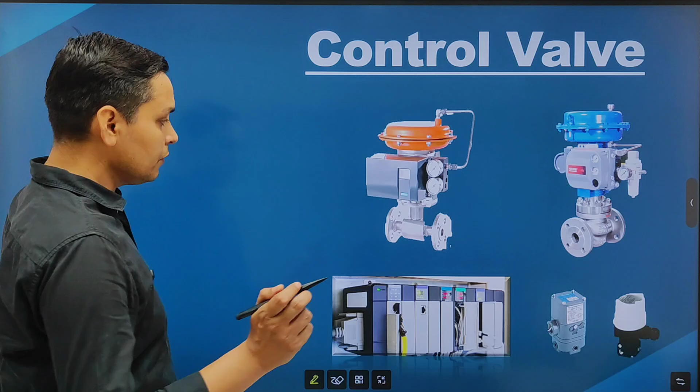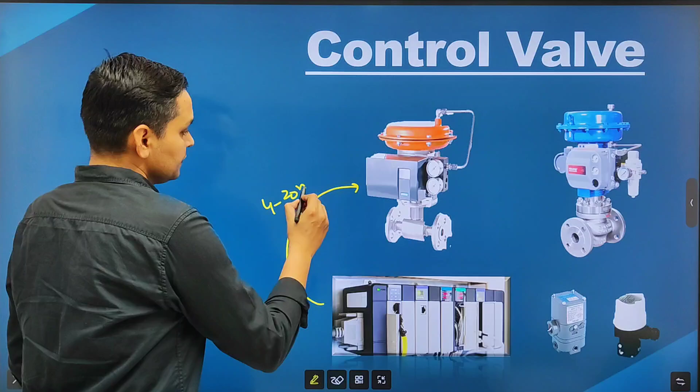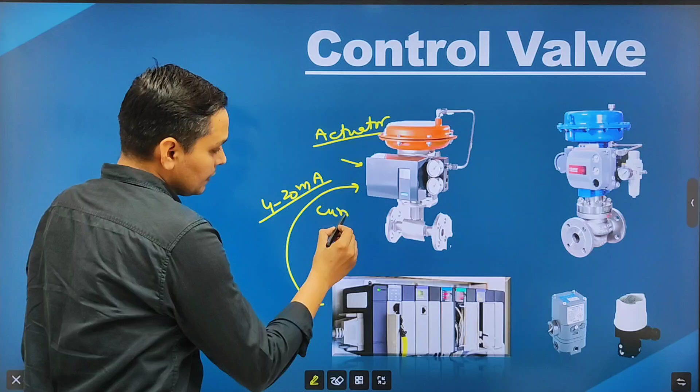Look friends, to operate a control valve, we will use a controller like PLC, DCS or PID controller. From this controller, a 4 to 20 milliampere signal is sent, and this 4 to 20 milliampere signal is sent to its actuator. Okay, now this signal is a current signal and we can denote current as I. Here in actuators, we can use a smart valve positioner, an electropneumatic actuator, and an I2P converter with valve positioner.

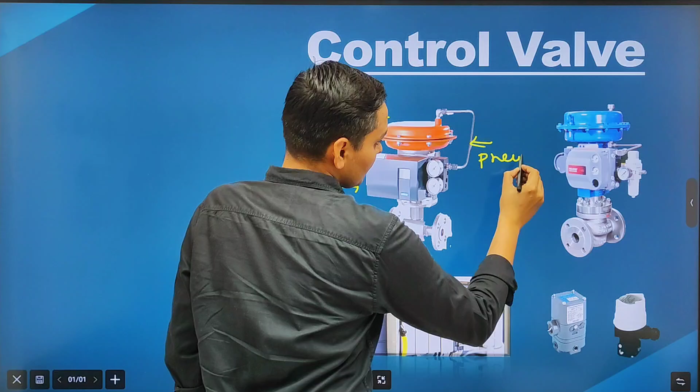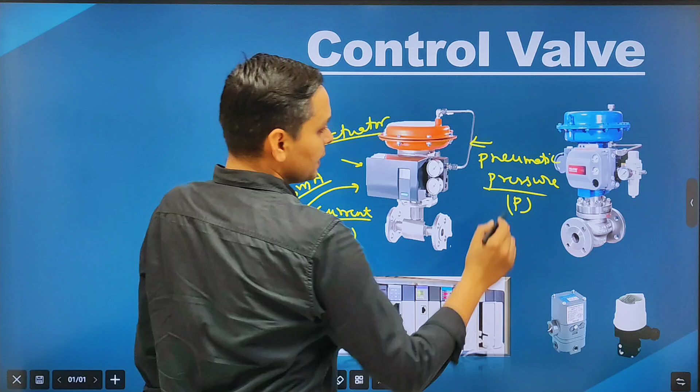Now, you can see that here a pneumatic signal, or pressure signal, is given to the control valve. Here pressure means air pressure, so we will denote it as P. Now to convert this I signal to this P signal, we will need a converter, so we use an I2P converter.

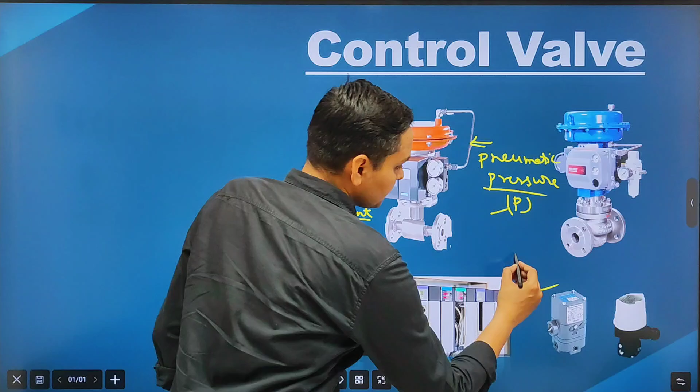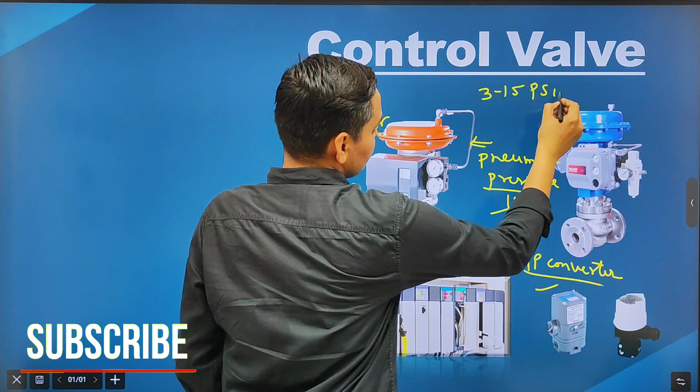And this I2P converter converts this 4 to 20 milliampere signal into a pneumatic signal, a 3 to 15 psi signal. Now this is the output of the I2P converter. The I2P converter is inbuilt in these positioners.

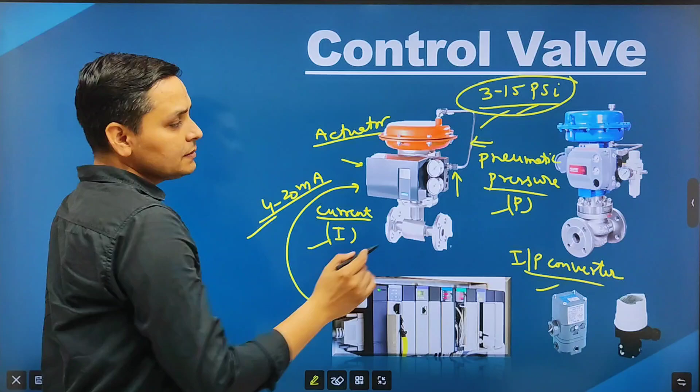Here the question arises: only by using this much signal can we operate the control valve? And the answer is no. We cannot operate the control valve by using this signal only. So now we will discuss how the control valve operates.

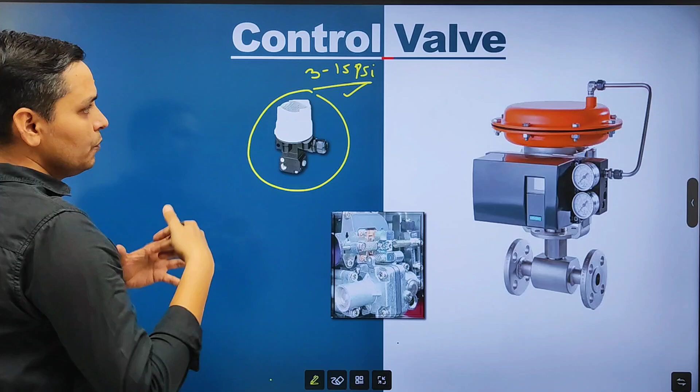Look friends, we have discussed that this I/P converter output is 3 to 15 psi. Okay. Now along with this 3 to 15 psi signal, to boost this signal, we will use a booster or a relay. You can see in this image, this booster or relay is used.

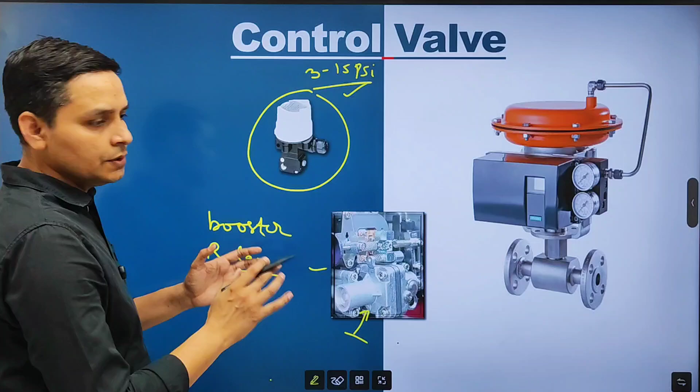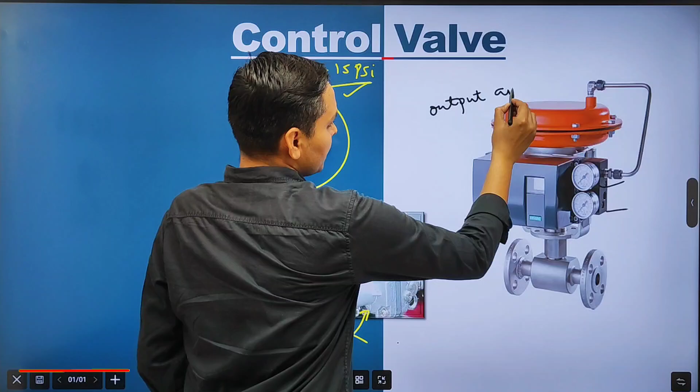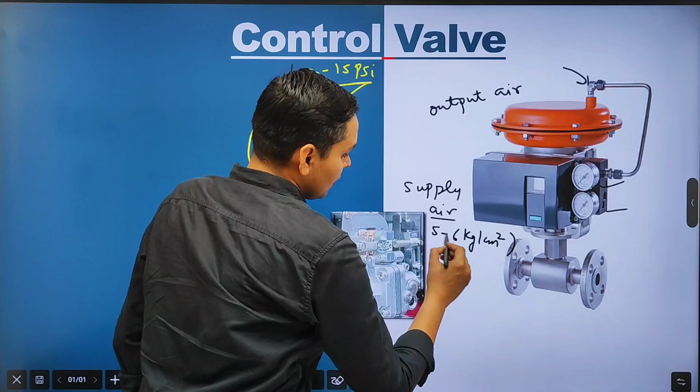Look friends, you can see that two gauges are shown in this image. One gauge is for output air for the control valve, and the other gauge is for supply air. Now this supply is 5 to 6 kg per centimeter square, or you can say this supply is approximately 80 psi. I think it is clear to you.

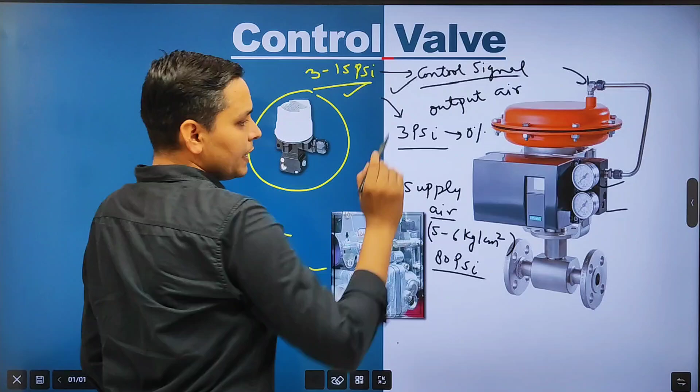Now what happens? This 3 to 15 psi signal works as the control signal for this control valve. Okay, because the control valve operates on a pneumatic signal, this control signal is used to operate it. Now how is this control signal used? When the I/P converter output is 3 psi, the control valve opening will be 0%, and accordingly here no air will be supplied, so the control valve will not operate.

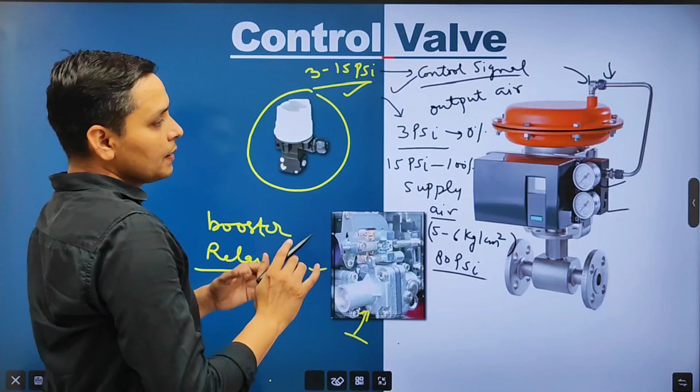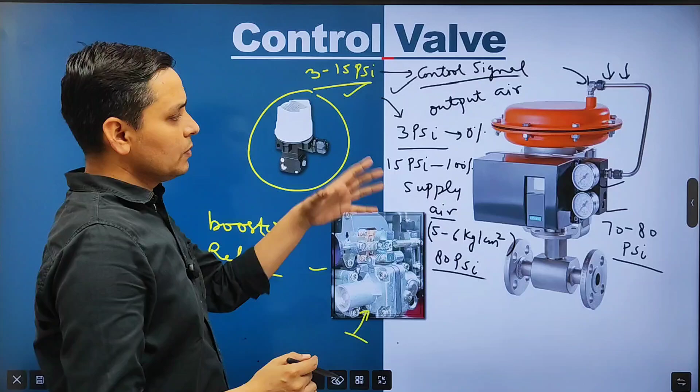And in case of 15 psi, the control valve opening will be 100%. In that case, maximum air will be supplied, so that the control valve will operate. That means 70 to 80 psi air will be supplied from here, so the control valve will operate according to the signal. And if we want to operate the control valve between 0 and 100%, this air varies accordingly. So this booster or relay plays an important role.

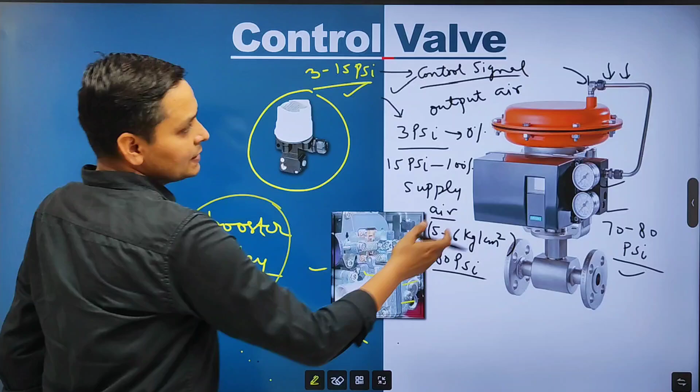Here, if you look at the valve positioner, you will find a relay like this, and you will find some screws for adjustment. What will we adjust? We will adjust this output air with these screws, so that the control valve opening will be adjusted by this positioner. So this booster relay is very important in a control valve. I think it is clear to you.

So friends, we have discussed how a control valve operates. I think it is clear to you.